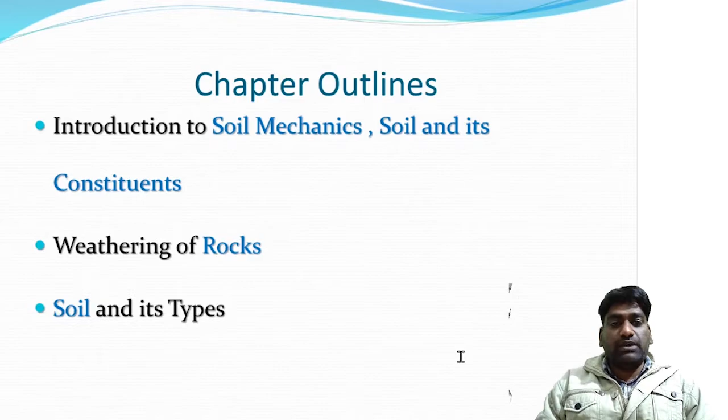So what actually do we mean by soil mechanics? Soil mechanics is defined as a branch of engineering science which enables an engineer to know theoretical or experimental behavior of soil under the action of loads. Loads may be static in nature or dynamic in nature. Number two, gravitational forces. Number three, water, and number four, temperature.

Simply speaking, it is a knowledge of engineering science which deals with the properties, behavior, and performance of the soil as a construction material or a foundation support.

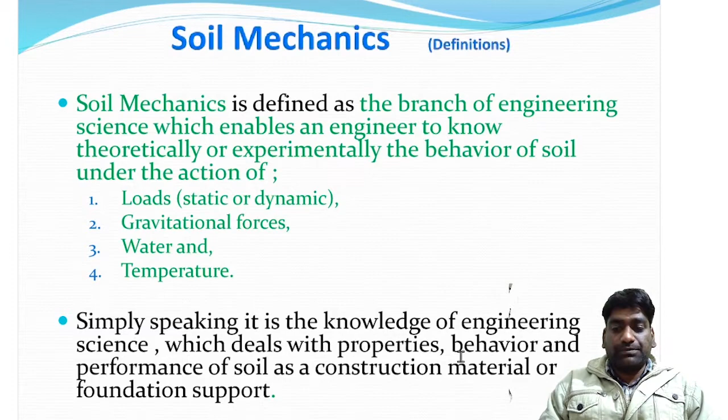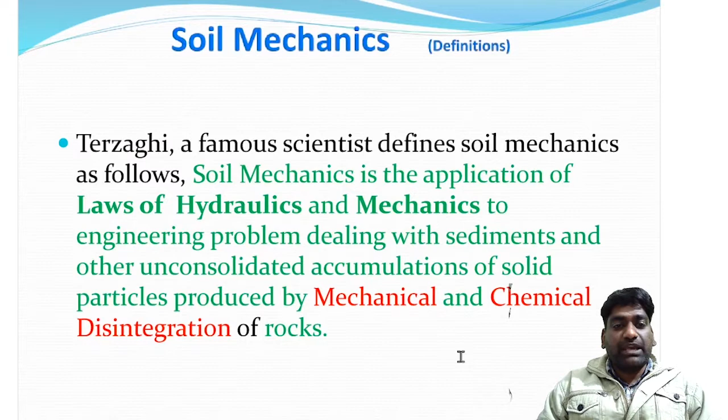So, as per Terzaghi, who is also known as the father of soil mechanics, a famous scientist who defined soil mechanics as follows: soil mechanics is the application of laws of hydraulics and mechanics to the engineering problems dealing with the sediments and other unconsolidated accumulations of the solid particles produced by mechanical and chemical disintegration of the rocks.

So, dear student, with the recent advancement in the science of engineering, the design and execution of large projects, which at times were considered beyond imagination and control, have now become quite common. Nowadays, skyscrapers, subways, maritime structures, offshore structures, dams, and bridges spanning the sea are some common examples of large projects. So there arises the need for the design and construction for almost such projects.

The engineer has to deal with earthen materials like soil and rocks, either as a construction material or as a foundation support. So as soon as these infrastructures come into the picture, like skyscrapers, buildings, subways, maritime and offshore structures, dams and bridges, not only spanning the river but also spanning the sea, knowledge of earthen material like rock and soil as a construction material or as a foundation support is of prime importance.

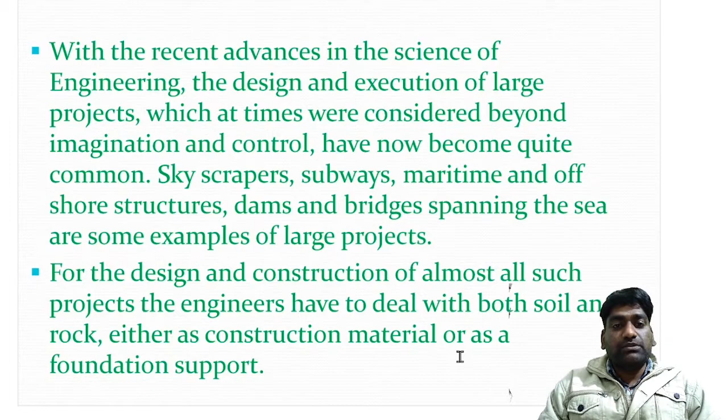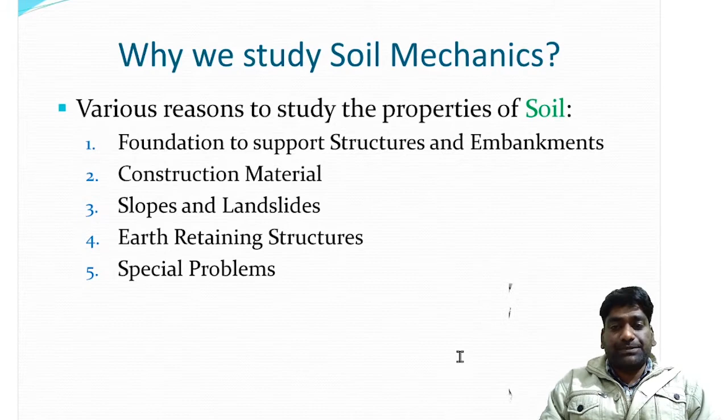So why do we actually study soil mechanics? Various reasons to study the properties of soil: foundation to support the structure and embankment, construction material, slopes and landslides, earth retaining structures, special problems. Various reasons to study the properties of soil.

Number one, foundation to support structures and embankment: effects of static loading on the soil mass, shear failure of the foundation soil, settlement of the structures, stability criteria solution. There should be no shear failure of the foundation soil. The settlement should remain within the permissible limit.

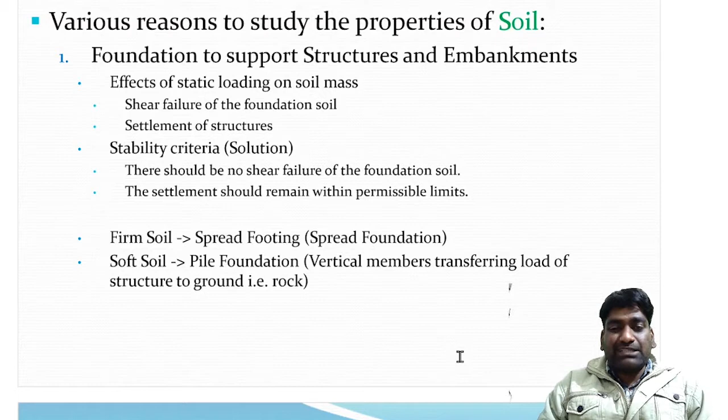For firm soil, we go for a spread footing, that is also termed the spread foundation, and for soft soil, we go for the pile foundation, that is basically the vertical members transferring the load of the structures to the ground. So this is an example. In the figure you can see the shear failure of the soil in a retaining structure, earth retaining structures, and for foundation.

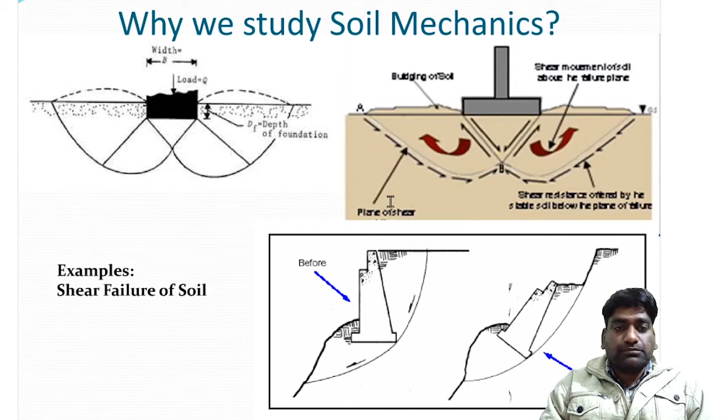So various reasons to study the properties of soil: foundation to support the structures and embankment, effect of dynamic loading on a soil mass. For design and construction of the roads, the following must be considered: compaction characteristics and moisture variation.

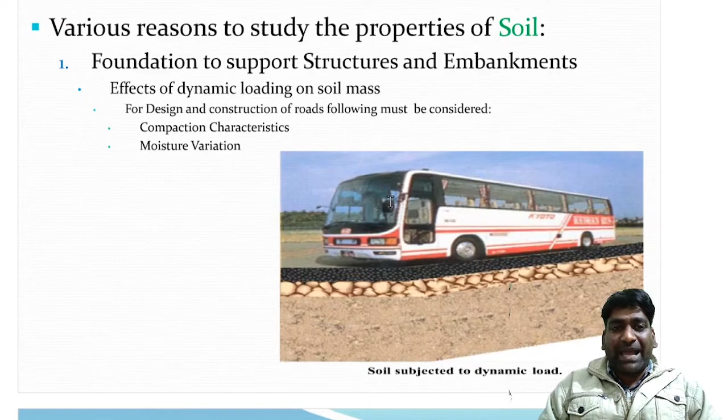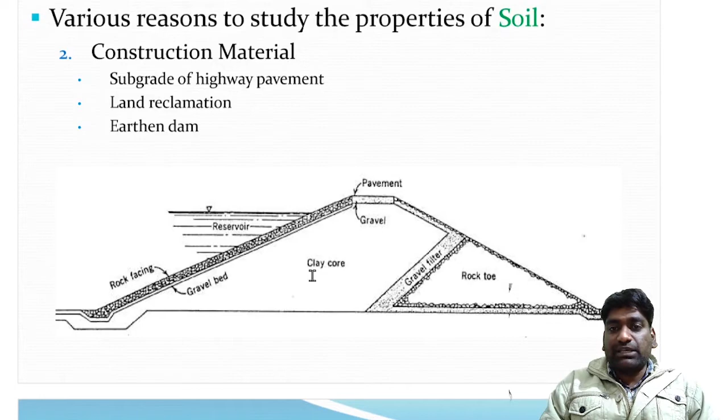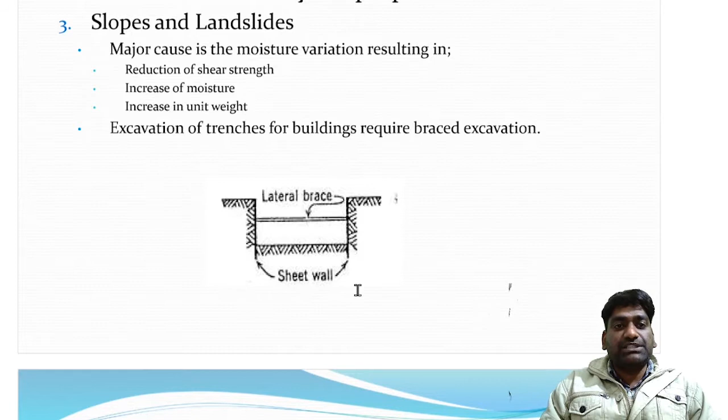In the case of slopes and landslides, the major cause is the moisture variation resulting in the reduction of the shear strength, increase of the moisture, increase in the unit weight. Excavation of the trenches for buildings requires braced excavation. There's the lateral brace, and these two are the sheet walls.

So landslide of a parking area. This is a diagram of landslide of a parking area at the edge of a steep slope, mainly due to the increase in the moisture content.

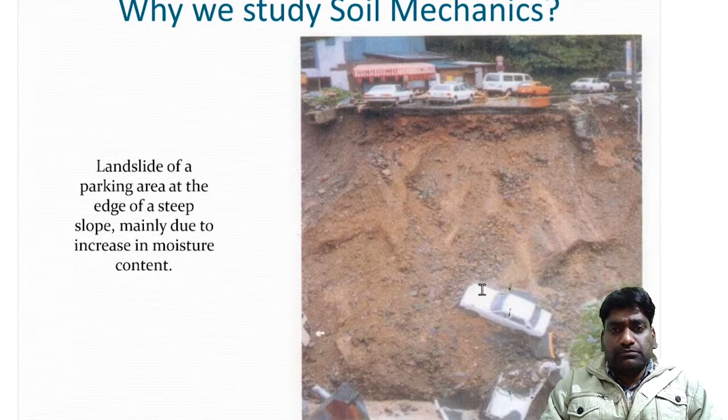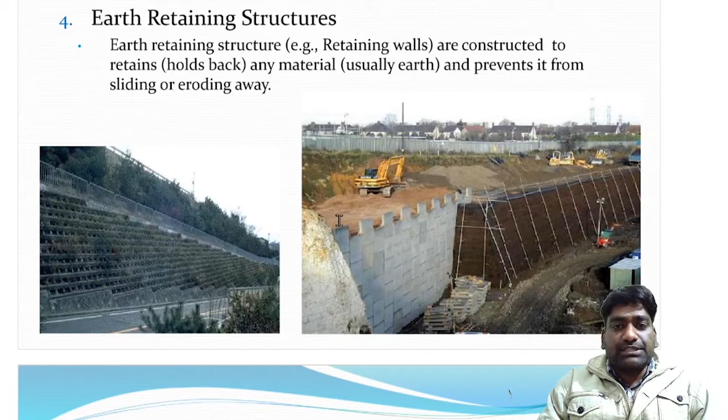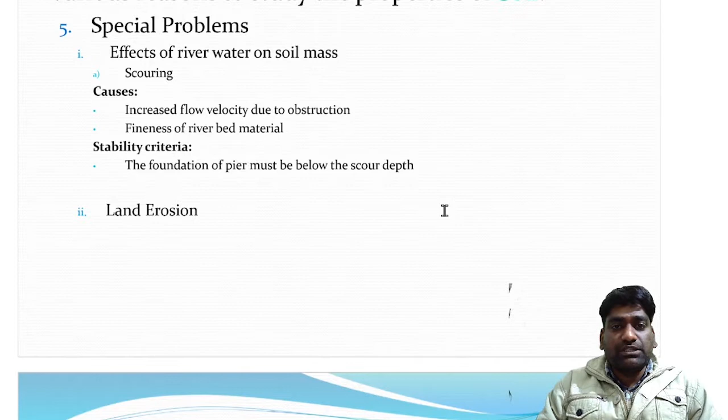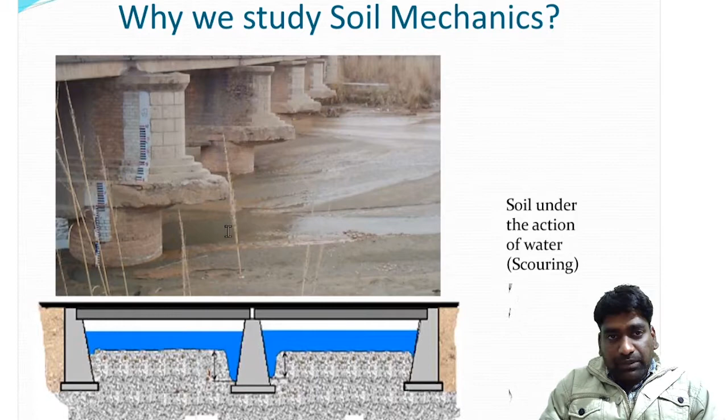A special problem like effect of river water on a soil mass. Number A is scouring, caused by increase in the flow velocity due to obstruction, and fineness of the riverbed material. Stability criteria: the foundation of the pier must be below the scour depth. Land erosion. So this is the soil under the action of water scouring. In this figure you can see foundation material has been scoured with the action of river water in this superstructure bridge.

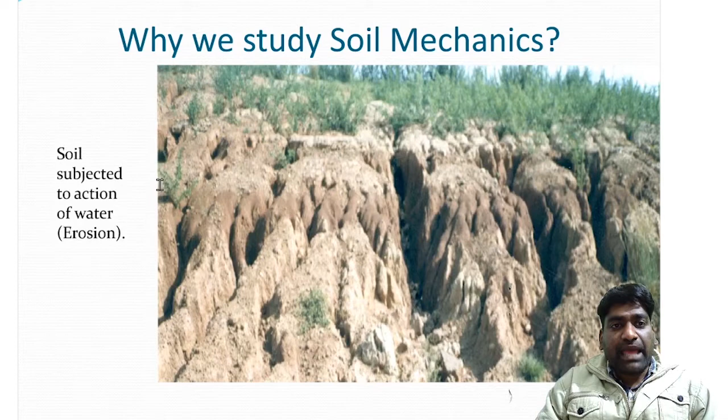This picture is clearly depicting the action of water on a soil, termed the erosion of the soil.

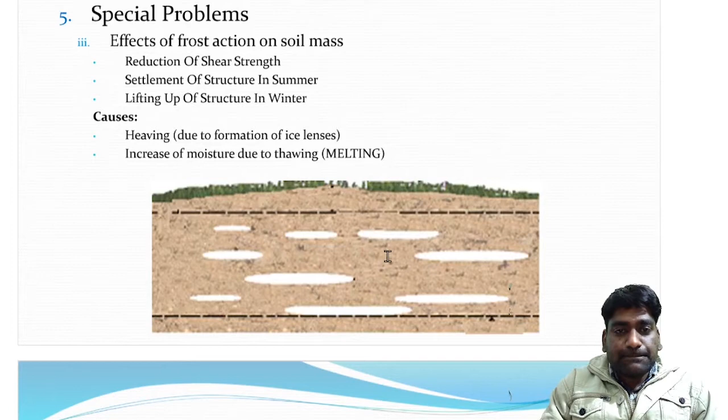Effect of frost action on a soil mass: reduction of the shear strength, settlement of the structure in summer, lifting up of the structure in winter, heaving due to the formation of ice lenses, increase of moisture due to thawing. Thawing means melting. So in this figure you can see the ice lenses. Soil subjected to low temperature, that is called frost action.

What are the different objectives of soil mechanics? Perform engineering soil surveys, develop suitable soil sampling devices and methods, develop suitable soil testing devices and methods, determine the physical properties of soil, evaluation and interpretation of the test results and their application to use of the soil as

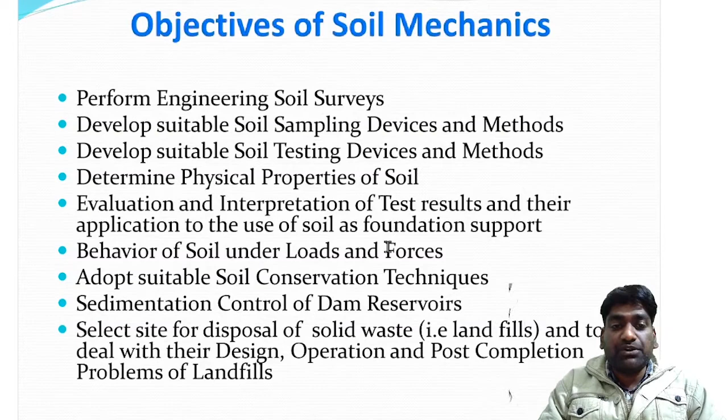foundation support, behavior of the soil under loads and forces, adopt suitable soil conservation techniques, sedimentation control of dam reservoirs, select a site for disposal of solid waste, that is landfills, and deal with their design, operation and post-completion problems of the landfills.

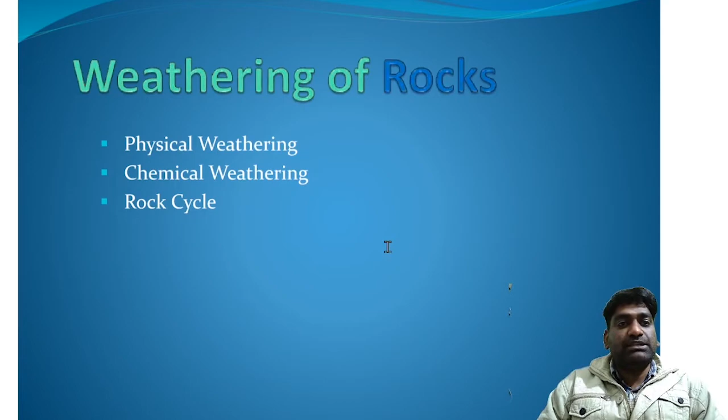What do you mean by weathering of the rocks? Weathering may be physical in nature, weathering may be chemical in nature, and the rock cycle; we are going to learn about all these things. So students, you might have gone through this cycle of weathering, but I am discussing it here. First of all, formation of magma takes place, and crystallization of magma causes the formation of intrusive igneous rocks, rather due to the action of consolidation.

These intrusive igneous rocks are converted into extrusive igneous rocks, and later on weathering occurs. Once the weathering of igneous rocks takes place due to certain physical, chemical or biological phenomena, then transportation, deposition and lithification take place, and the igneous form is converted into sedimentary rocks, and due to the action of heat and pressure, metamorphism occurs and metamorphic rocks are formed.

So this cycle keeps going on, and formation of igneous rocks and metamorphic rocks takes place. You might have learned this topic in geography also, and if you have gone through the subject of geology, then you have also learned about the weathering of rocks.

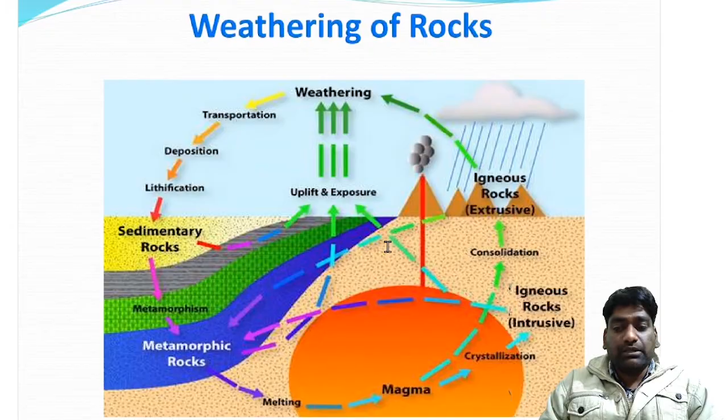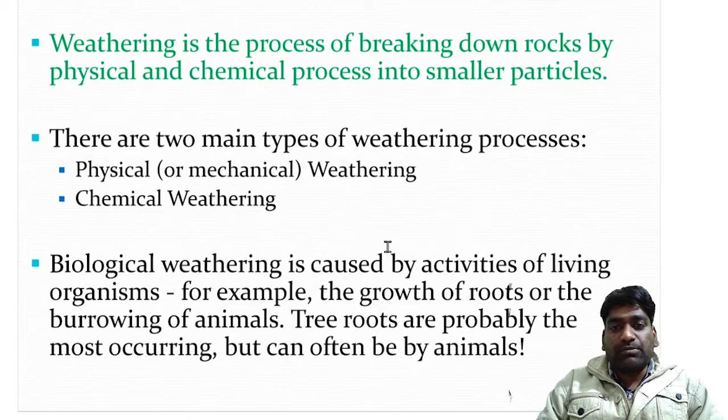So weathering is a process of breaking down rocks by physical and chemical processes into smaller particles. There are two main types of weathering: physical or mechanical weathering, and chemical weathering. Biological weathering is caused by the activities of living organisms, for example, the growth of roots or burrowing of animals. Tree roots are probably the most common, but it can often be animals.

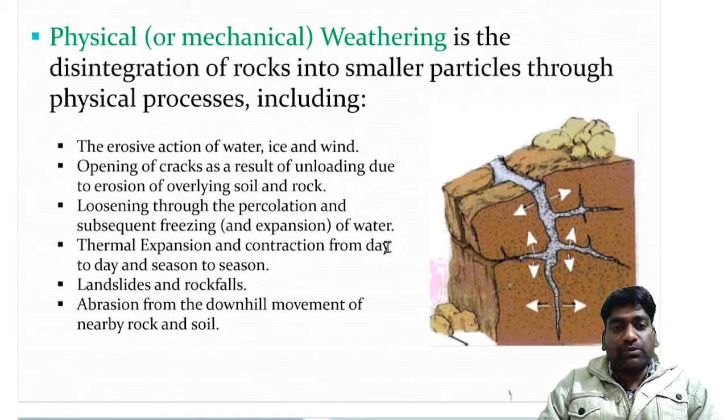Physical or mechanical weathering is the disintegration of the rock into smaller particles through physical processes, including the erosive action of water, ice, and wind, opening of cracks as a result of unloading due to the erosion of overlying soil and rocks, loosening through percolation and subsequent freezing and expansion of water, thermal expansion and contraction from day to day and season to season, landslides and rockfalls, and abrasion from the downhill movement of nearby rocks and soils.

Chemical weathering is the disintegration of the rocks through chemical reactions between the minerals in rocks, water, and oxygen in the atmosphere.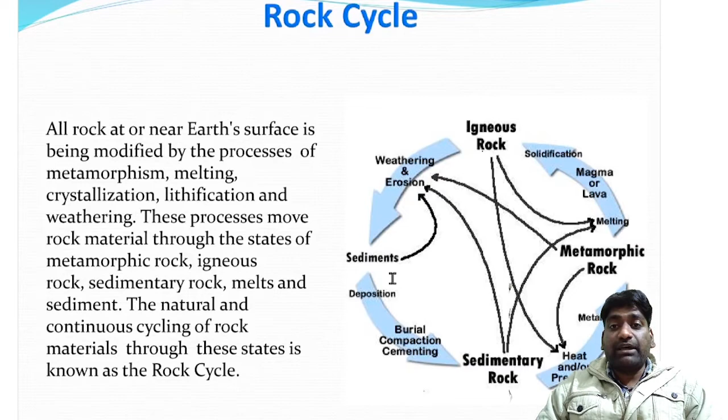And due to the process of metamorphosis and the action of heat or pressure, these sedimentary rocks are converted into metamorphic rocks. Once these metamorphic rocks melt, they get converted into magma or lava, and on solidification are again converted into igneous rocks.

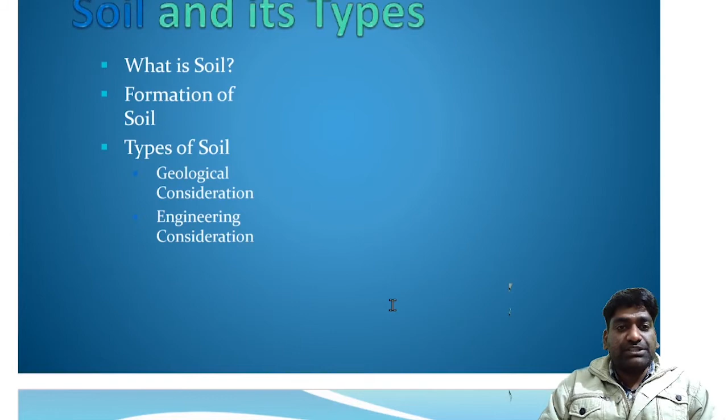Now, what is soil? How are they formed? Their differentiation depending on their geological consideration and engineering consideration. So, soil, according to the engineering point of view, is defined as a material by means of which and upon which engineers build their structures. The term soil includes the entire thickness of the earth crust, from the ground surface to the bedrock, which is accessible and feasible for practical utilization for foundation support or as a construction material.

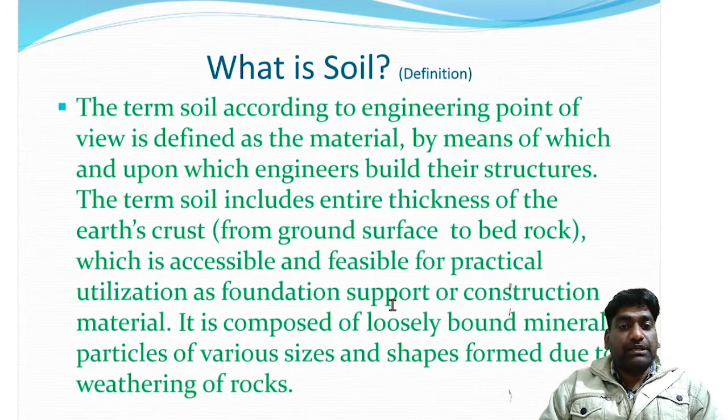It is composed of loosely bound mineral particles of various sizes and shapes formed due to the weathering of rocks. So, how does soil formation take place? Soil is generally formed by the disintegration and decomposition weathering of the rocks through the action of physical or mechanical and chemical agents which break them into smaller and smaller particles. So in this figure you can see a disintegration of the bedrocks. Organic material facilitates the disintegration, horizon formation, and developed soil supports thick vegetation.

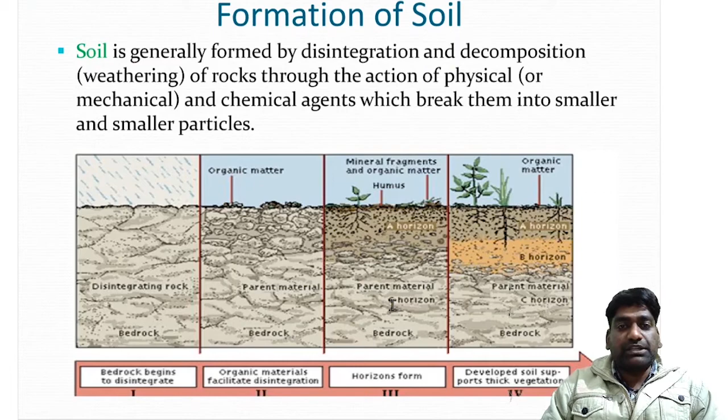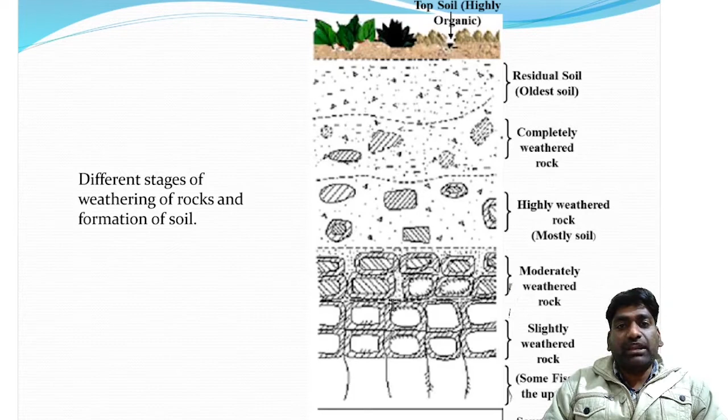So these are some different stages of the weathering of the rocks and formation of a soil. Formation of a sound massive rock, some fissures in the upper zone, slightly weathered rock, later on moderately weathered rock, then highly weathered rock, and then completely weathered rock, and after all you get a residual soil, that is the oldest soil, and at the top of the earth crust you will get the top soil, highly organic in nature.

So here comes the types of soil depending on their geological consideration. Basically, the history or the formation of the soil deposits greatly influences its properties and behavior. The properties of soil highly depend on the process through which the soil deposits have been developed. Following are the types of soil based on the geological agents or process through which the soil deposits have been developed. So, what is basically glacial soils?

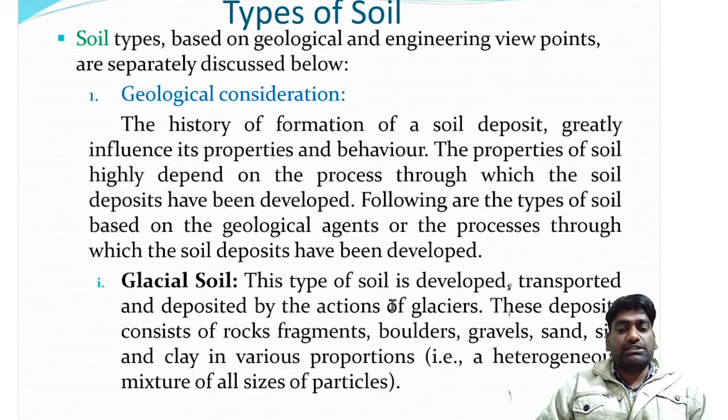These are the types of soils which are deposited and transported by the action of glaciers. Where are these types of soils found? If you're in Uttarakhand, you will go to the Gomukh or Gangotri glaciers. All these glaciers are present in the hilly terrain only. Such types of soil will be found. So these deposits consist of rock fragments, boulders, gravels, sand, silt, and clay in various proportions. That is a heterogeneous mixture of all sizes of particles, and this is termed the glacial soil. You will basically find these types of soil in hilly terrain where glaciers are formed.

So residual soil, these types of soil are found on nearly flat rock surfaces where the weathering action has produced a soil with little or no tendency to move. Residual soil also occurs when the rate of weathering is higher than the rate of removal. Alluvial soil: if the soil is transported and deposited by the water, it is called alluvial soil.

As the flowing water, stream or river loses velocity, it tends to deposit some of the particles that it was carrying in suspension or by rolling, sliding, or skipping along the river bed. coarser or heavier particles are dropped first. Hence, on the higher reaches of the river, gravel and sand are found. However, on lower parts, silt and clay dominate, where the flow velocity is almost zero or very small.

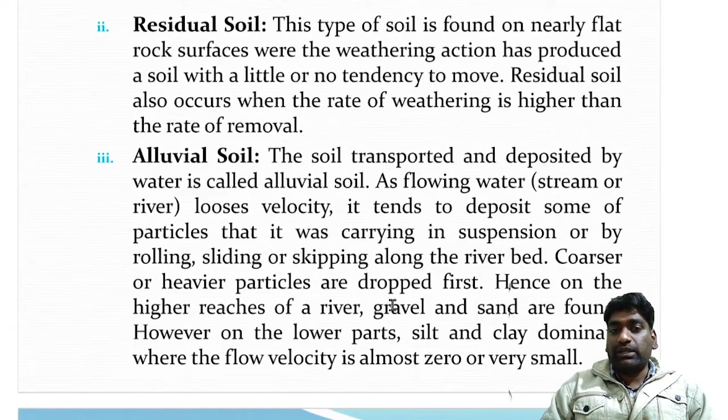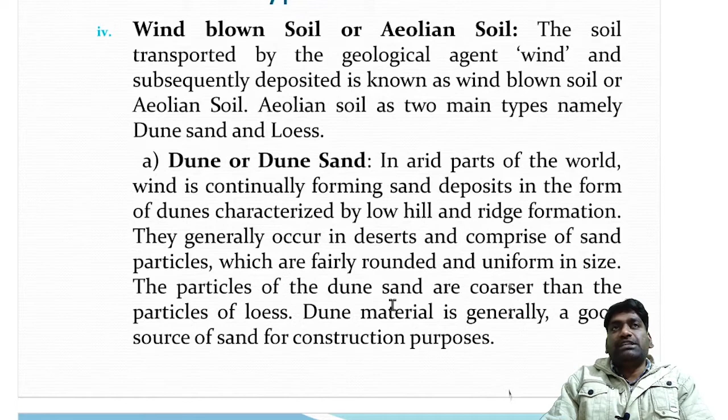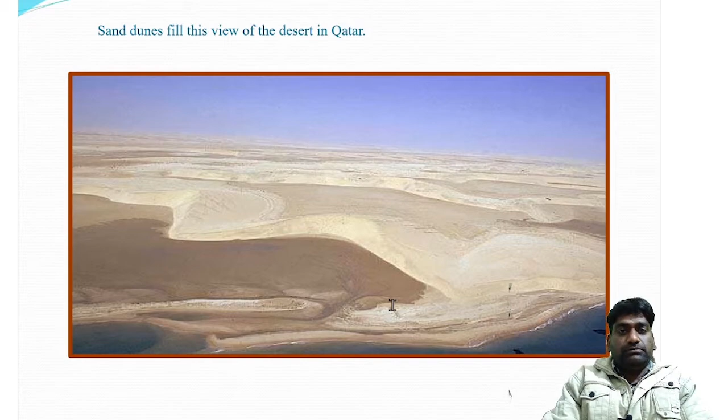Loess. Loess is basically an accumulation of silt. Accumulation of wind-blown dust, mainly siliceous silt and silty clay laid down in a loose condition. This is known as loess. So saturated loess is very weak and always causes a foundation problem, that is of liquefaction. Colluvial soil: the accumulation formed by the rock fragments and soil material resulting from the mechanical weathering of the rock is known as colluvial soil.

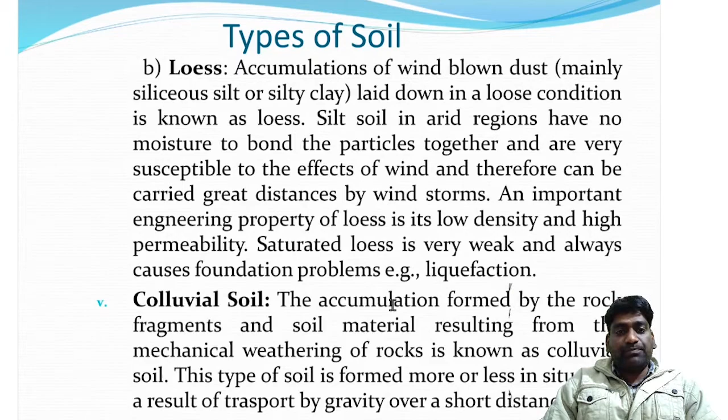So as far as engineering consideration is concerned, we classify the soil first of all as clay, whose particle size is less than 2 micron. It is composed of very fine particles less than 2 micron in size. They are flaky in shape, therefore have considerable surface area. These surfaces carry electrical charge, which helps in understanding the engineering properties of the clay soils. In moist condition, clay becomes sticky and can be rolled into threads.

Due to the electrical charge, clays show high interparticle attraction and thus exhibit sufficient cohesion. It has high dry strength, low erosion, low permeability, good workability under moist condition, and can be readily compacted. Also susceptible to shrinkage and swelling. Clay soils commonly have brown color.

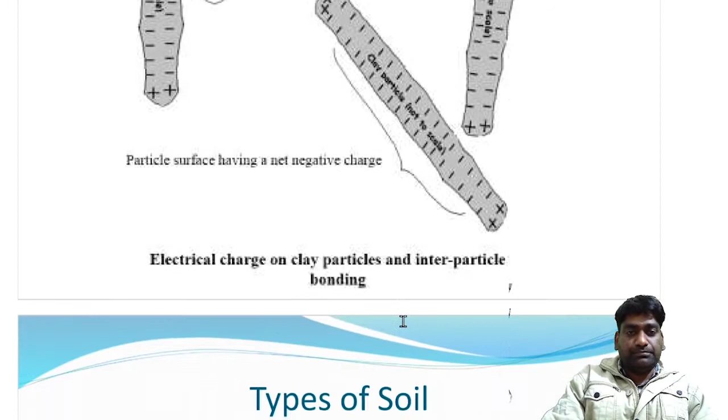So this is an example of clay particles. Electrical charges on a particle and interparticle bonding can be very clearly seen in this figure. Number 2 comes the silt particle. It basically lies between 2 microns to 60 microns, 0.002 mm to 0.06 mm.

It is composed of very fine particles ranging between 0.002 and 0.06 mm. It has high capillarity, no plasticity, and very low dry strength. It possesses properties of both clay and sand, that is, it shows slight cohesion and also friction. The color of the silty soil is mostly brown.

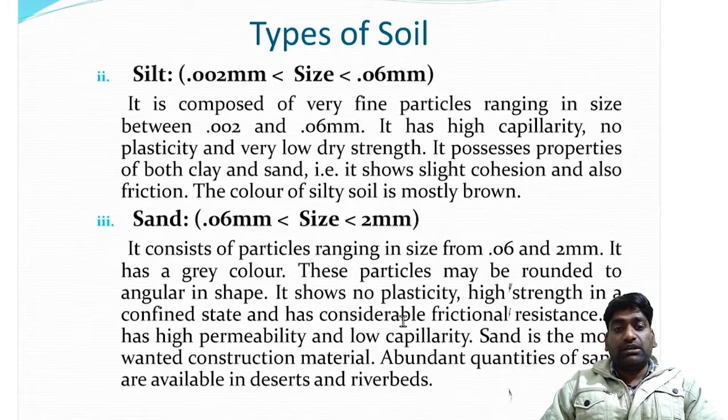Sand consists of particles ranging in size from 0.06 to 2 mm. It has a gray color. The particles may be rounded to angular in shape. It shows no plasticity, high strength in a confined state, and has considerable frictional resistance. It has a high permeability and low capillarity. Sand is the most wanted construction material. Abundant quantities of sand are available in deserts and riverbeds.

Gravel: size lies between 2 mm to 60 mm. They consist of particles varying in size from 2 mm to 60 mm. They form a good foundation material. They show high frictional resistance. The frictional resistance depends upon the particle size and shape. Gravel produced by the crushing of rocks is angular in shape, while that taken from riverbeds is sub-rounded to rounded. They show very high permeability. When sand and silt are mixed with gravels, their bearing capacity is further increased, but permeability may be decreased.

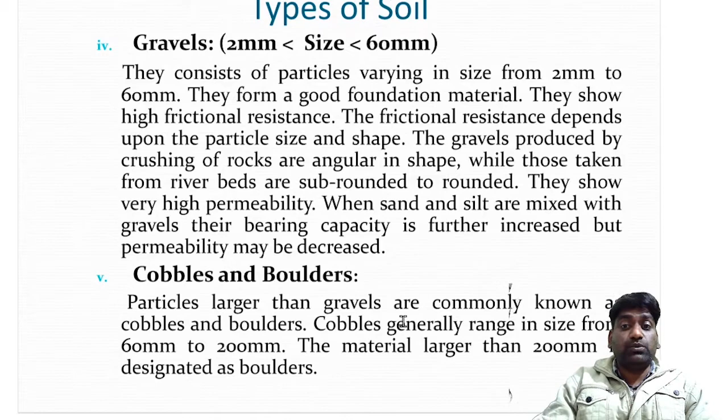Cobbles and boulders: particles larger than gravels are commonly known as cobbles and boulders. Cobbles generally range in size from 60 mm to 200 mm. The material larger than 200 mm is designated as boulder.

Organic matter: the main source of organic matter is plant or animal remains that are added to the soil. When these organisms die, plants decompose at a slower rate than animal remains. Commonly about 12 inches of soil from the top surface has a major concentration of organic matter. It undergoes large volume changes under loads and contains high natural moisture content. The strength of a soil is very much reduced when the concentration of organic matter is more than 2%, and the soil is considered unsuitable for foundation support.

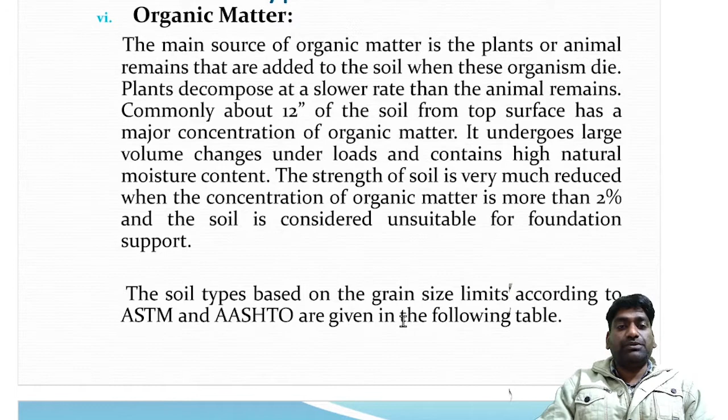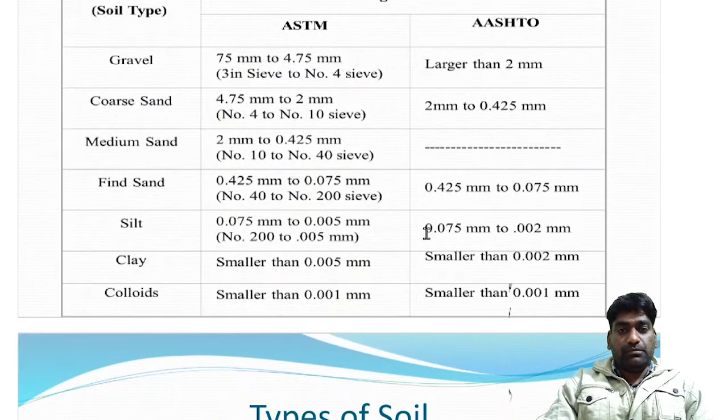So basically the soil types based on grain size limits are according to ASTM and AASHTO classification also. But I think I have to discuss all these things later on, as there is a chapter on engineering classification of soil, so I would be discussing these things later on. But now we will see the nomenclature of soil types depending on the range of particle size.

It is termed gravel if the particle size lies between 75 mm and 4.75 mm, and as per AASHTO classification it should be larger than 2 mm. It is termed coarse sand if the size lies between 4.75 mm and 2 mm, and as per AASHTO classification between 2 mm and 0.425 mm. Medium sand as per ASTM, if the particle size lies between 2 mm and 0.425 mm, or I should say 425 micron. And fine sand if the particle size lies between 425 micron and 75 micron, and as per AASHTO

classification also. It is termed silt if the size lies between 75 micron and 5 micron. Same is the case with AASHTO classification. Clay if it is less than 2 micron. Here it is clay size if the particle size is between 5 micron and 2 micron. And colloids should be smaller than 1 micron. So these are some engineering classifications of the soil.